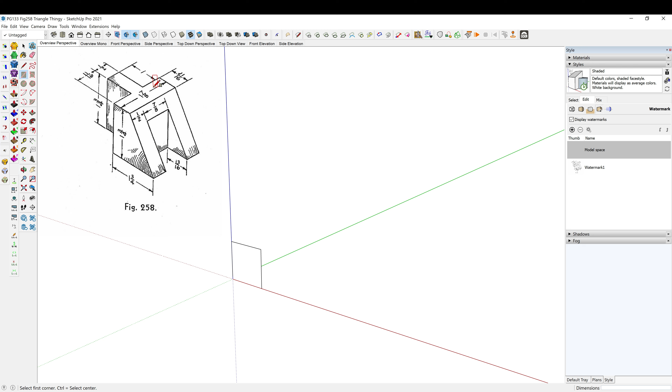Alright, and then it is 1 7/8 inches long, so P to push pull, 1 7/8, enter. Okay, and then we have 11/16 for the top piece there. So T for tape measure, and I'm going to go 11/16 to drop in a guideline.

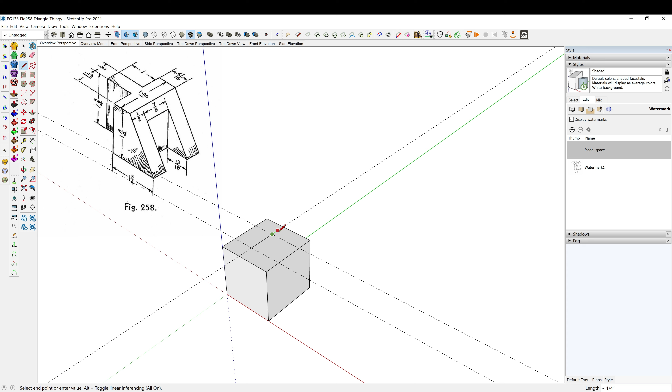Alright, so now we have a 1/2 inch here, so drop in 0.5, enter. 7/8 there, continue along, 7/8, enter. L for the line tool, draw in that guy. And then let's go back to T to draw in some additional guidelines here.

So L, I'm going to draw inside, so you're not going to be able to see where I'm going here, but basically I'm connecting this dot to this point. Escape, and then go from this point down to this point.

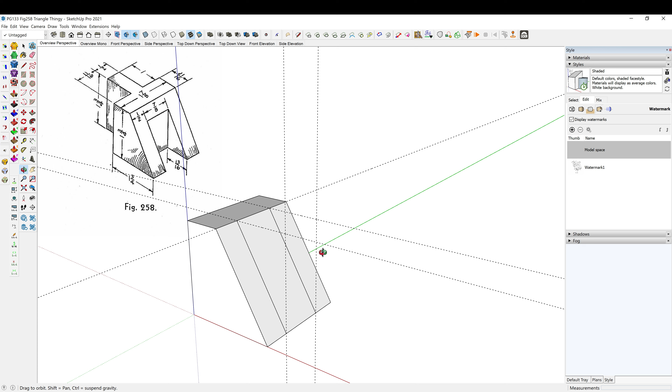Okay, and so then T, let's back up here. 11/16, I got that, so that's 13/16. I'll go from the bottom. I'm going to delete my current guides. T, that's 13/16, 13/16.

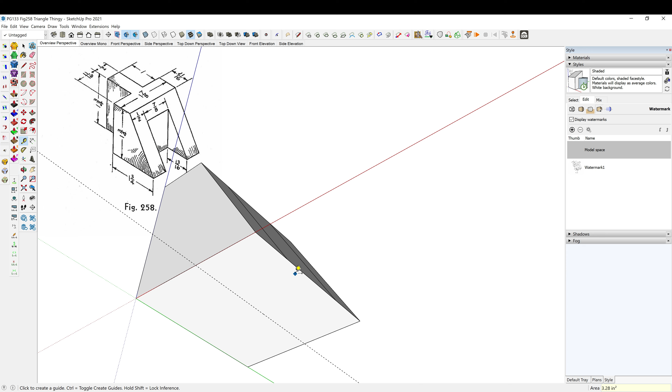Alright, L for line, and then I'm going to go from that point. Right arrow key to lock onto the red axes to snap to this guideline. Left arrow key for the green axes to snap to the guideline, and then I'm just going to go up here and reference off of this point.

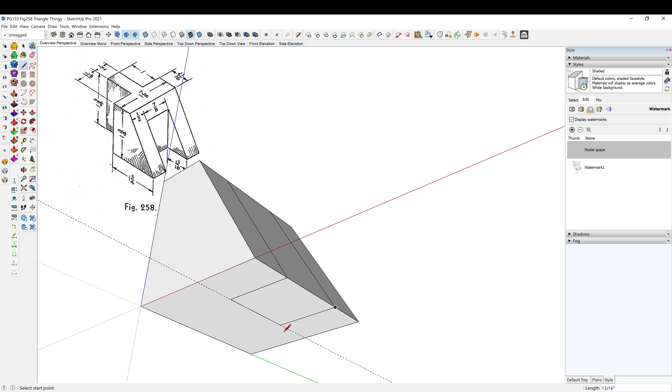Alright, and then let's see if I click here. Up arrow key to lock on to the blue axes. I'm just going to overshoot it here for now. Up arrow key to lock on the blue axes. Escape to release it. I'm going to go from point to point.

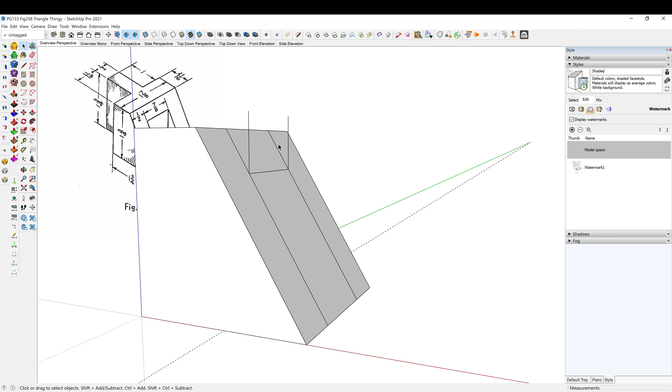Alright, now let's clean up this. Delete that. Delete that. Alright, and then I'm going to delete this piece right here. Alright, and that gives me my little cutout there.

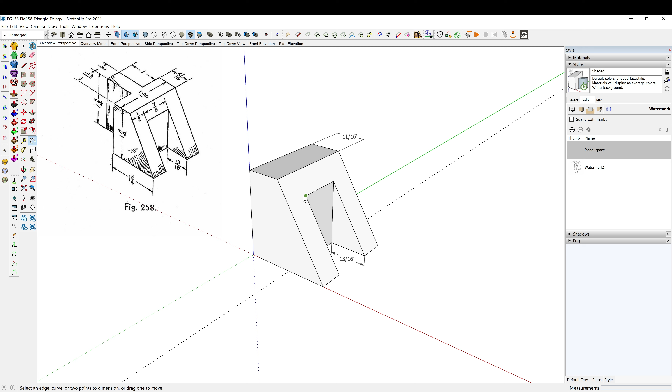13/16, yep. And then this guy right here should be 11/16. Okay. Half inch. 7/8.

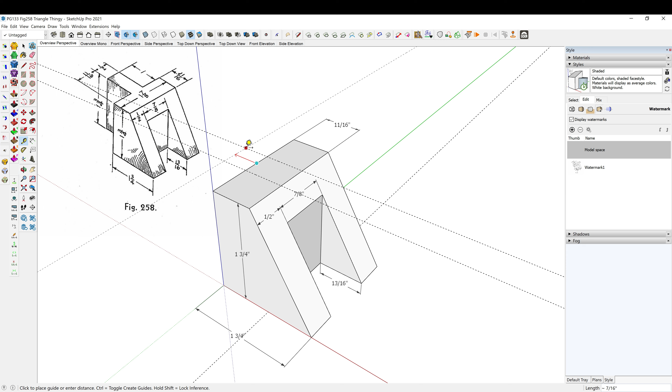Okay, so now let's draw the back half in. So we have 11/16, so T, go over 11/16, enter. And then we're going to go over another 1/2 inch, 0.5, enter. And then 1 inch right here, so I'm going to follow my guideline out, 1 inch.

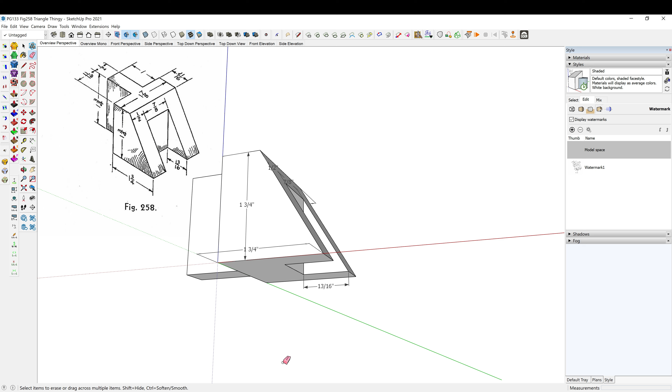Alright, R for rectangle, and just draw that in. P to push pull, go all the way down until I snap to the base. Alright, so let's clean this up. E, I don't need that line. Control E to delete all my guides. Delete that guy.

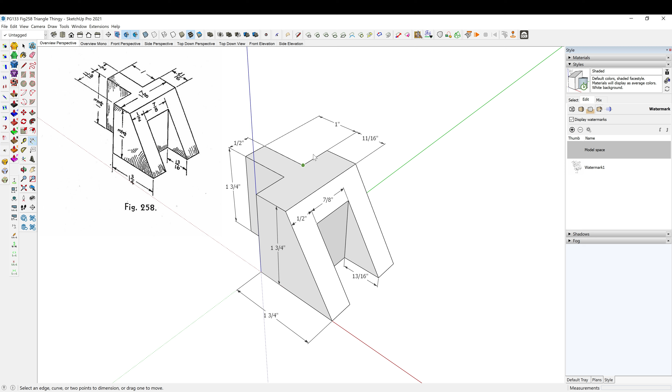Alright, let's drop in some dimensions here. Oops. All right, there we go.

And that is the end of today's practice drawing. Thanks for drawing along.